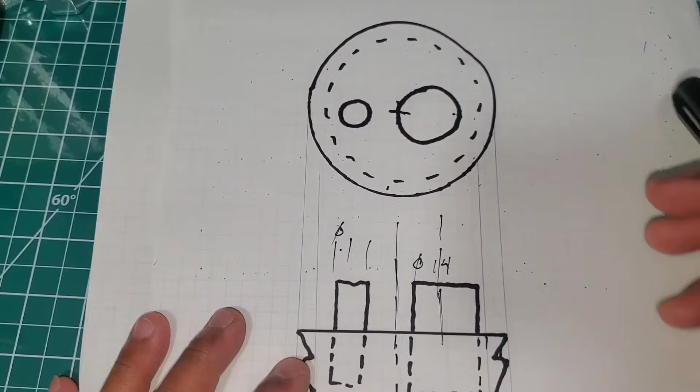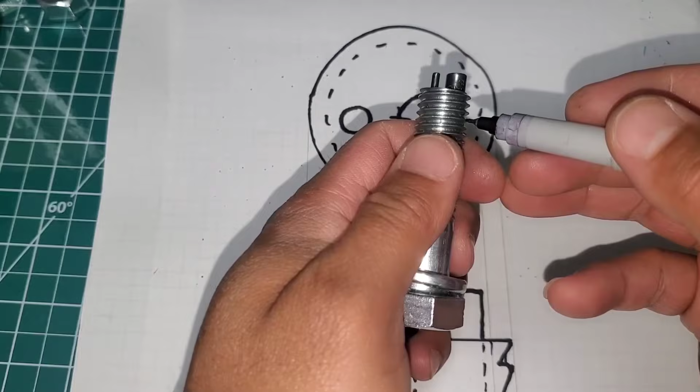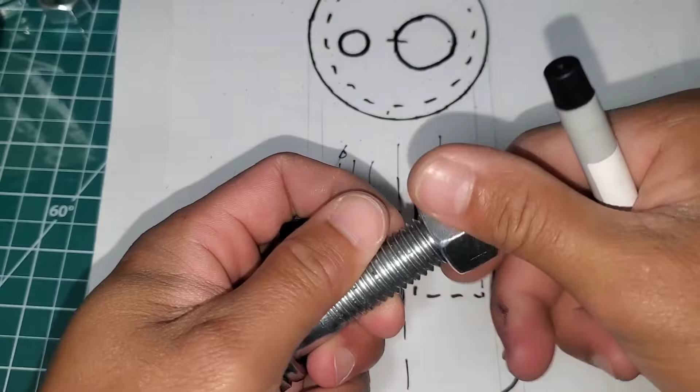So what I did is this circle in here represents the outside diameter of your bolt, and this hidden line will represent the minor diameter of the bolt. When you put the dowel pin on the bolt, you need to focus on not touching the thread. You need to consider that, so that when you put the nut inside it, it's not interrupted, like so. So what I did, this is the 1/4 dowel that will represent the internal diameter of your wire.

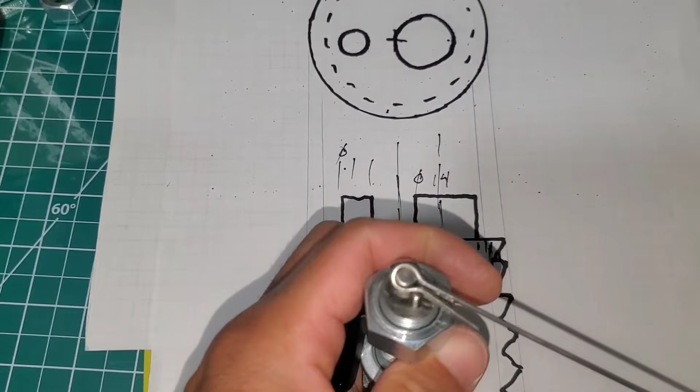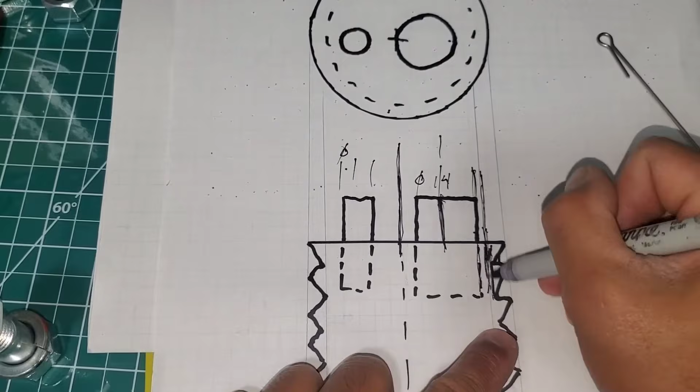And this small pin will just serve as a cornering for your bender. So what I do is from the center, I calculate half of my dowel pin, but I considered an allowance so that it will not touch the thread. It will depend on you.

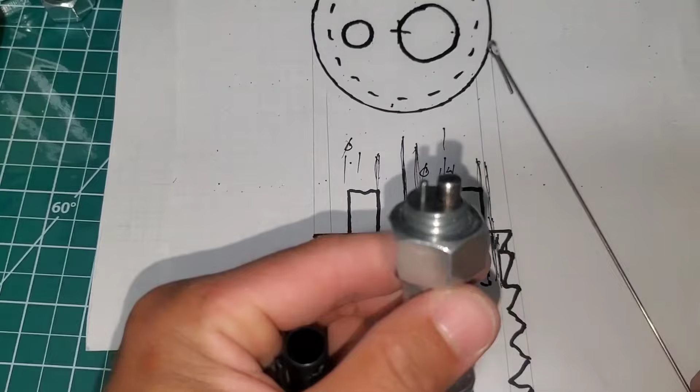And in this part, this is the gap, like this. You need to consider the thickness of your wire, it will fit in there, like so. And you need to put an allowance. I'm not good at explaining, but it will make sense.

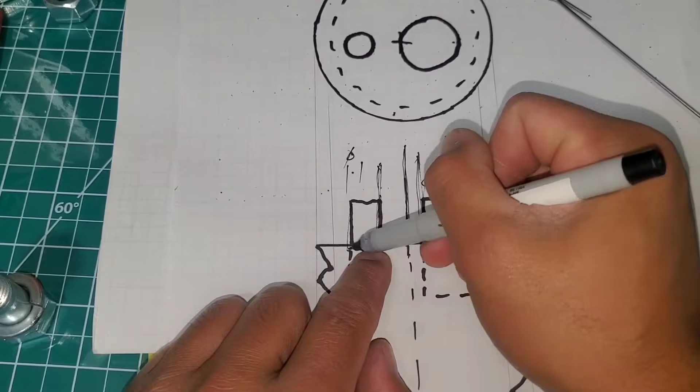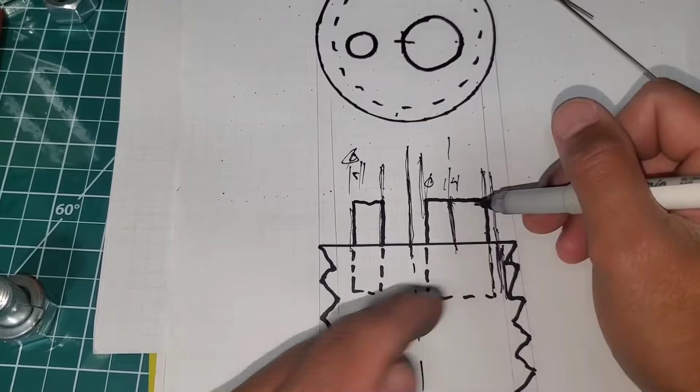And this is the dowel pin, the small dowel pin that will just serve as a corner bender. I use a diameter of 0.11 inches in here, or it will depend on you and what your material is. And this is 1/4 inch, that's what I want and what I need. But sometimes I also need a smaller one, like this one. This one is 1/4 for my bigger lure, and this one is for my smaller lures.

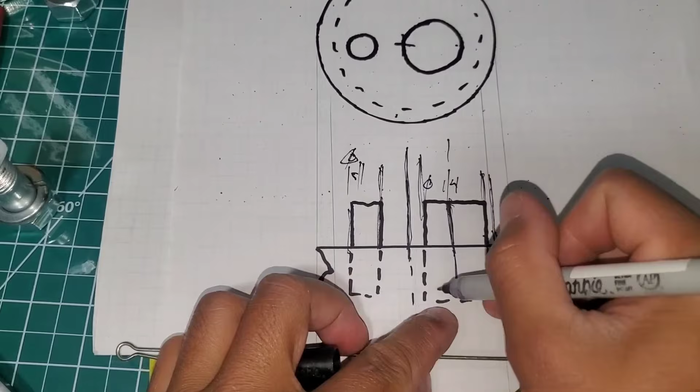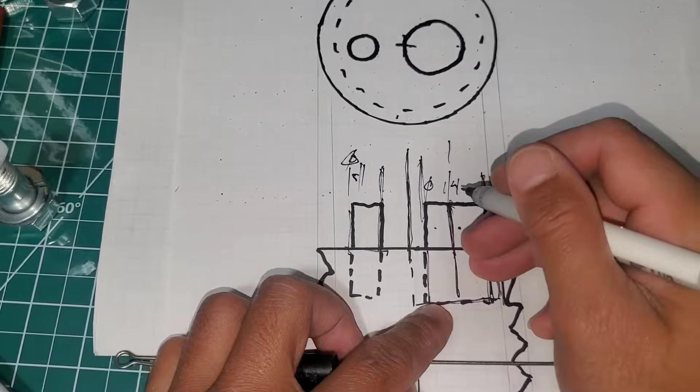So I drilled it like here, and I put 1/2 of the total length of my dowel pin so that it won't go out. And when you drill in here, it's supposed to be smaller than your dowel pin, so that when you press it, it will not go out. It's supposed to be a press fit like that, and also with the smaller one.

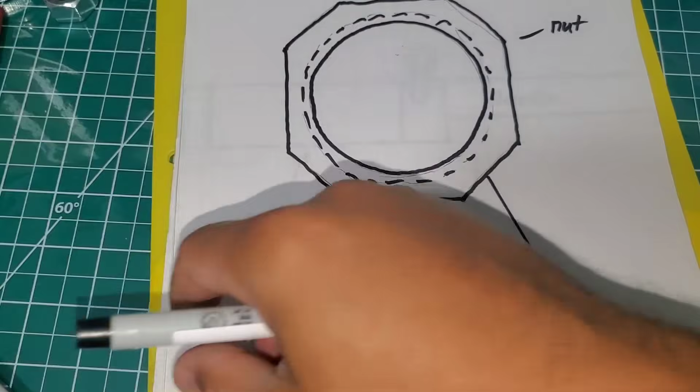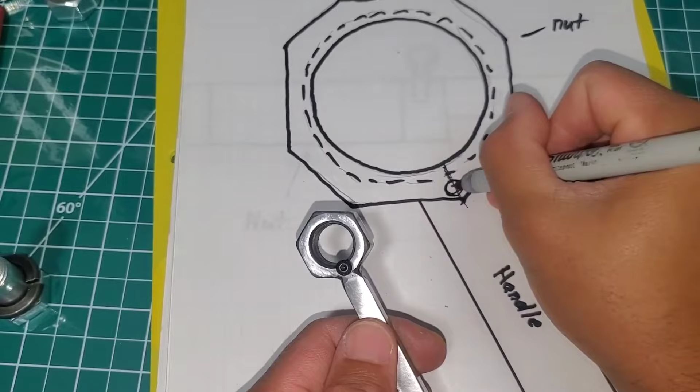And for the nut, here's the nut, the assembly of the nut. This will serve as the main bender, and this will serve as the body. What I did, I welded a handle into the corner here because this is the thickest part of the nut. And also I drill here and put a thread for my M3 bolt, like so. It doesn't focus like that.

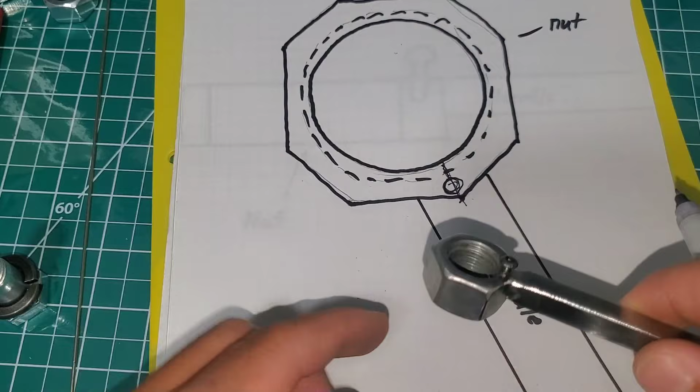You don't need to thread it through and through. You need to put a little bit of space for your wire that will catch the wire and bend it, and the head will serve as a stopper so your wire won't go out, like so. And this is the explanation for that.

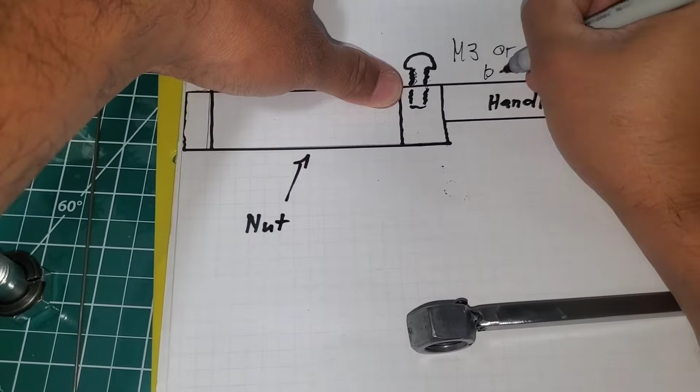This is the nut, and when you put your M3, I use an M3 or M4 bolt. The length is at least 3/4 inch, because 1/2 of that will be threaded on the nut. And this is the handle.

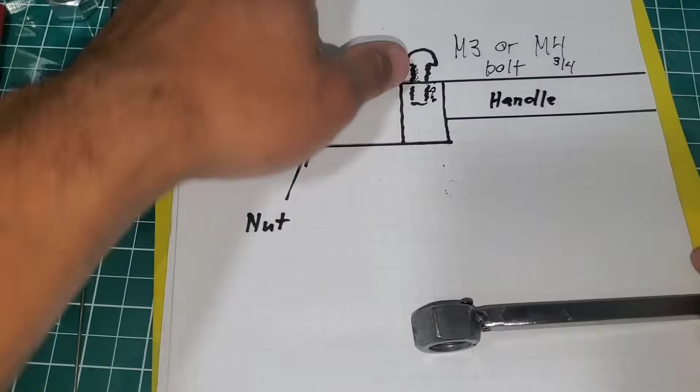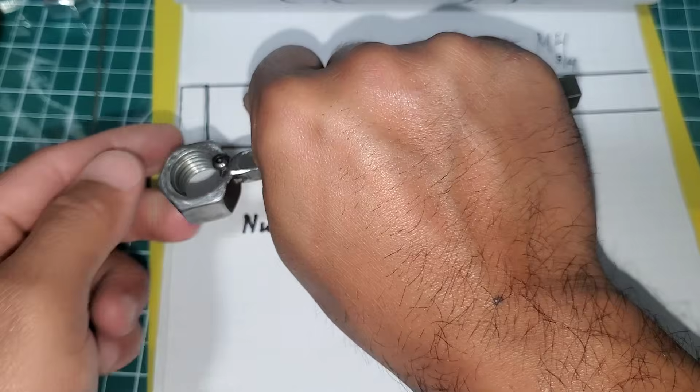The handle, it will depend on you and what material is available to you. You can use round wire or anything, and I measure it with my hand like that, like so.

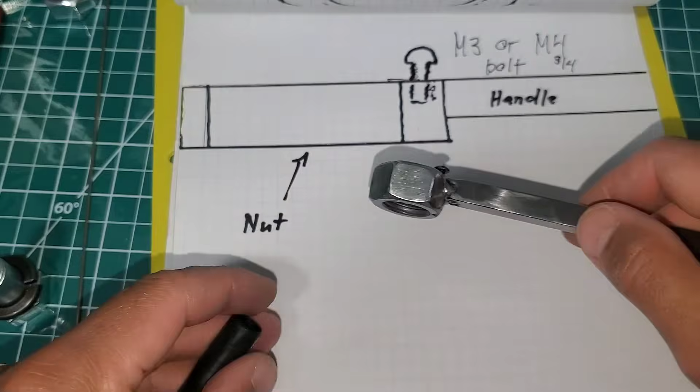Approximately 5 inches, like that. So on how to make it, let's make a video of it. Just stay tuned. So here are the materials for making the bender.

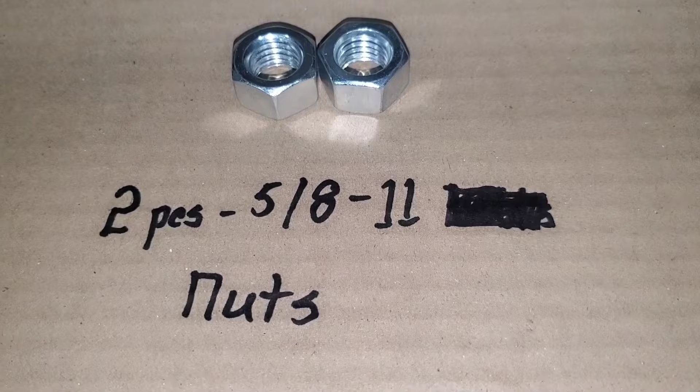We need 2 pieces of 5/8 by 11 nuts. This will serve as the locking of the bolt onto the table, and the other one we will make as the main bender of our DIY bender.

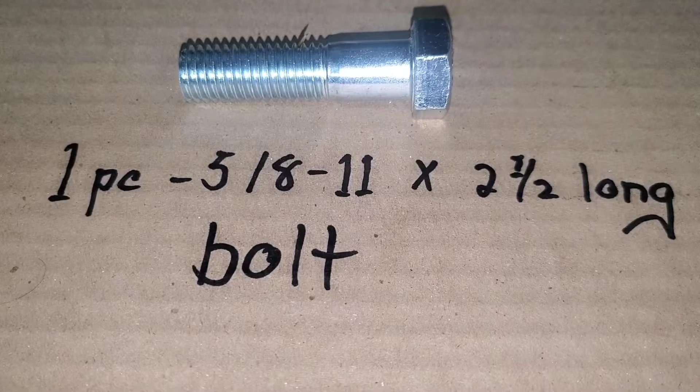We put the handle in it, and then the M3 bolt, and then of course 1 piece 5/8-11 by 2.5 inches long bolt, like this one, at least 2.5 inches because we will put it on our table like this one, and we will put a lock on it to hold it in place, and a handle like this one.

I use a square bar and I put a notch in there for welding on the nut, at least 4 inches in length. I just measure it on my hand, and it will depend on you.

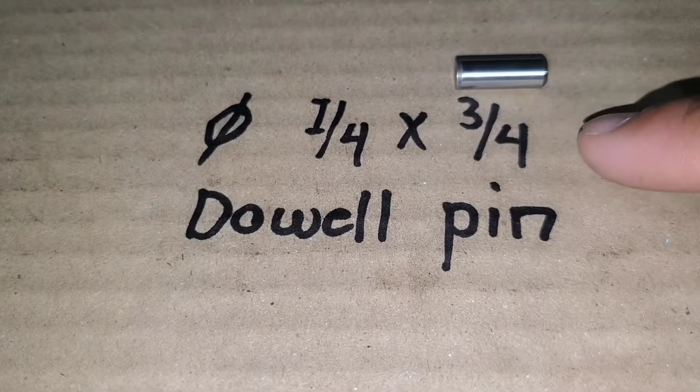It will serve as the cornering for our bender. And of course, the M3 by half-inch long bolt, or sometimes three-quarter long, like that one.

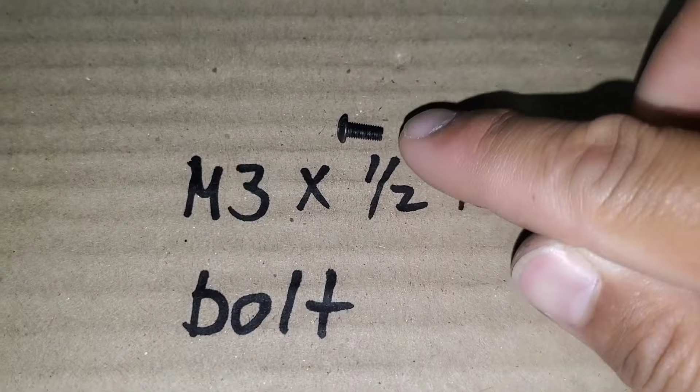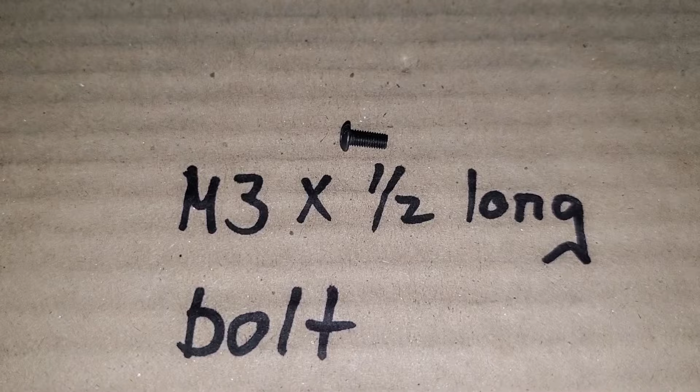It will serve as the catcher for our wire, and that will bend the wire through the dowel pin.

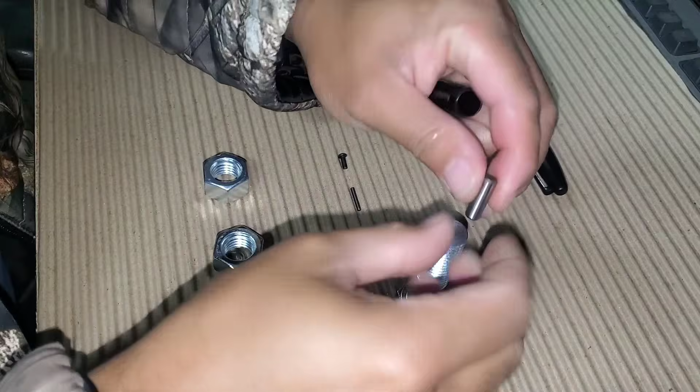Let's start making it. I'm making a mark for the drill to put this dowel pin, but I considered not to touch the thread outside.

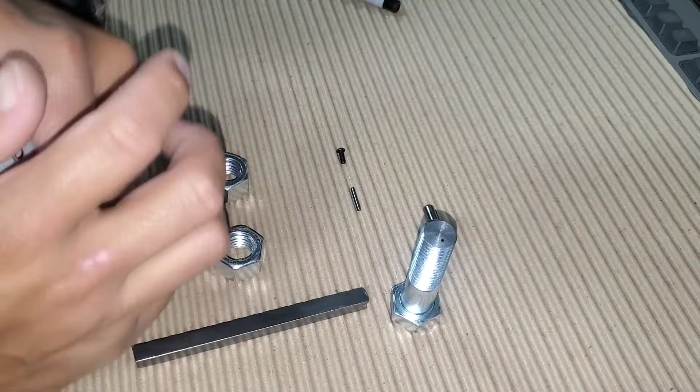It will depend on you. You can just estimate it, or you can calculate it. It will depend on you. I just calculated with my eye. I put a mark in there for drilling.

Like that. And also another one for the smaller pin, but let's see if I put it like that.

I'm just checking for the allowance for the wire, and also not to touch the thread. I think it's okay.

And then I put the dot in there to put my smaller pin, and the dot in there for drilling for the major pins, that's two holes.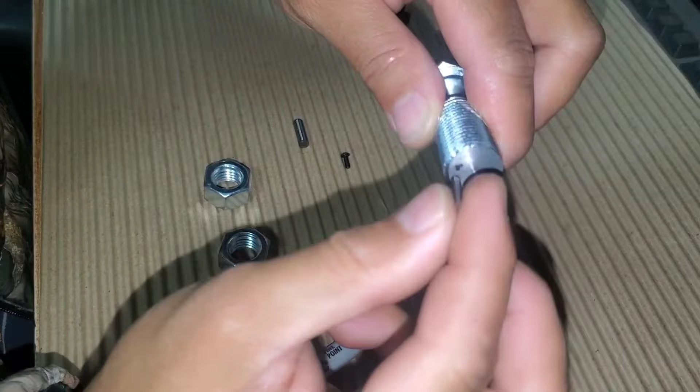Two dots in there. And I'm gonna put it like that and like that.

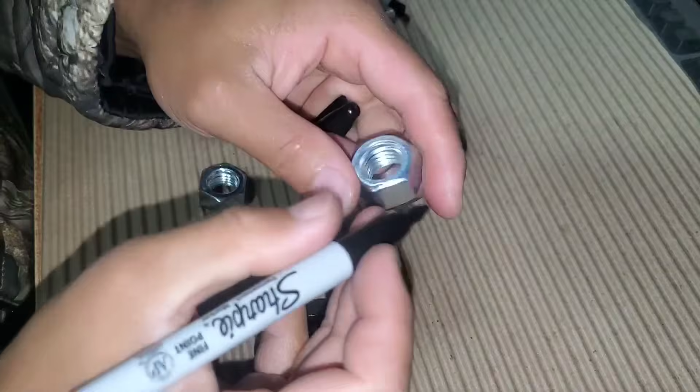So in this part, this is the nut that will serve as our main bender, and I'm choosing the corner of the hexagonal because that is the thickest part that I can drill.

For the M3, and put a thread in it without touching the internal thread. I will put this small bolt in there.

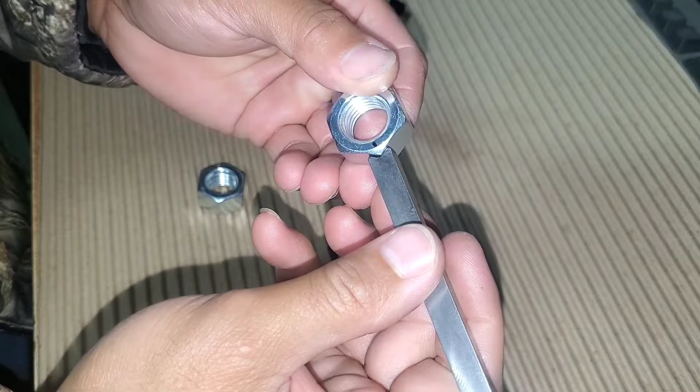This is M3, and I'm going to weld the handle in there where the bolt is located.

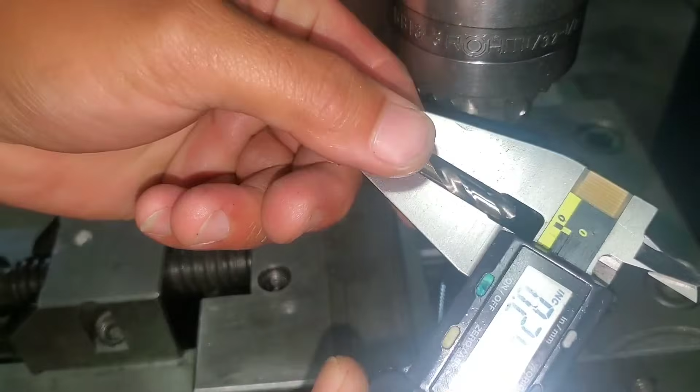Now let's drill it. I'm using a smaller drill for my quarter-inch dowel pin. I'm using a 0.2425 drill.

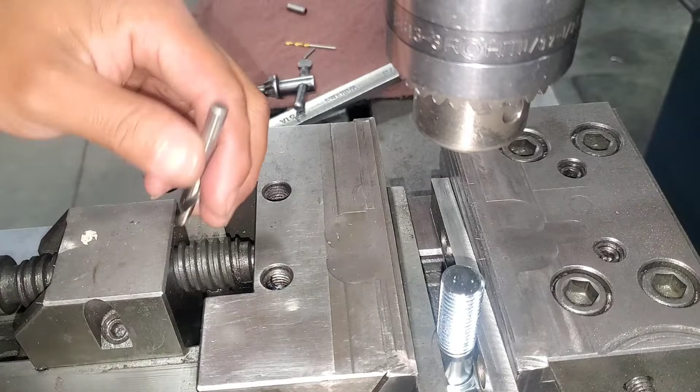A 0.2425 drill that is smaller than my dowel pin.

Now since I finished the drill for the quarter-inch dowel, I'm going to drill for the smaller dowel pin.

I'm using the 0.089 because my dowel pin is 0.1. It is a little bit smaller so that when I put the dowel pin it will press fit, not too loose.

Now it's okay. So now I'm going to press fit the dowel pins into the hole.

See, as you can see, the dowel pin will not enter the hole that I made because it is bigger than the holes.

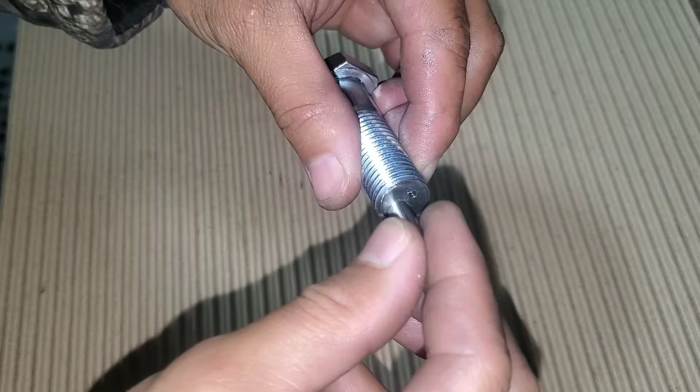The holes are only 0.24. My dowel pin is 0.25, and the other smaller hole is 0.091, but my dowel pin is 0.094.

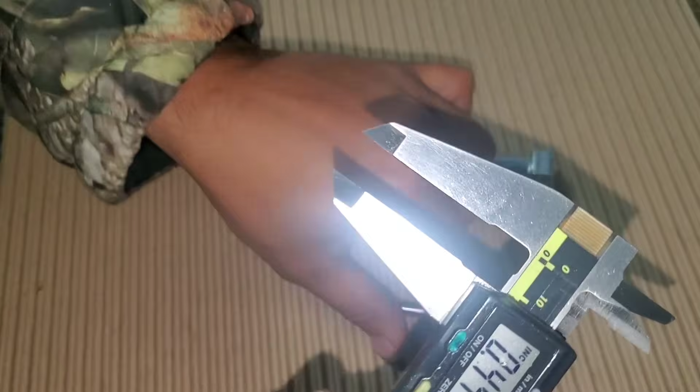And the quarter-inch dowel pin, it is smaller. So what I need is to just grind a little bit in there.

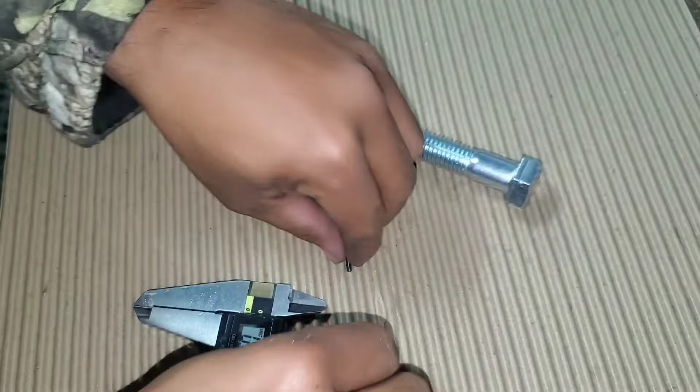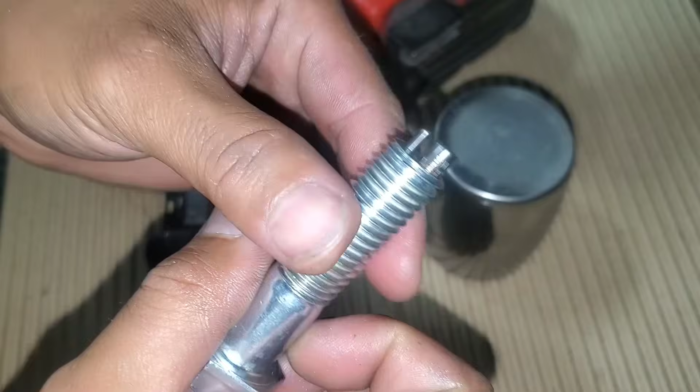But not too much, just to make a corner, and then this is it. I press it. I didn't show you how to press it, but I just hammer it in there in place and then grind it to make it even.

And the gap, let's see what is the gap.

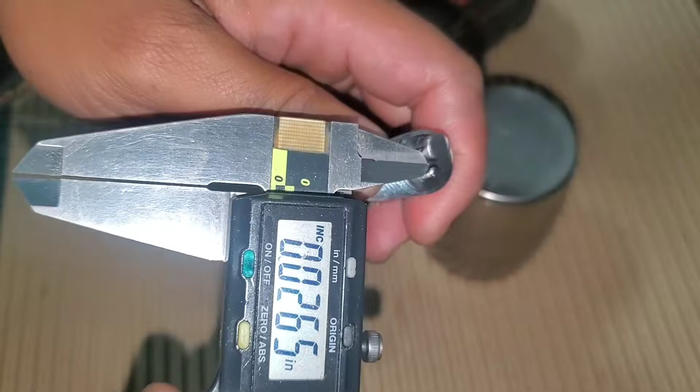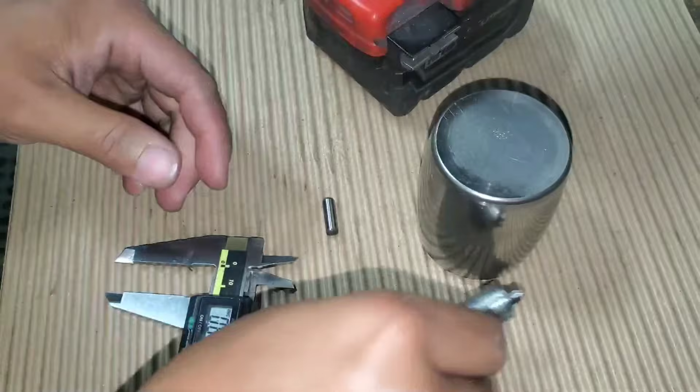Now it's good. And now what I'm going to do is to assemble the nut, the main bender.

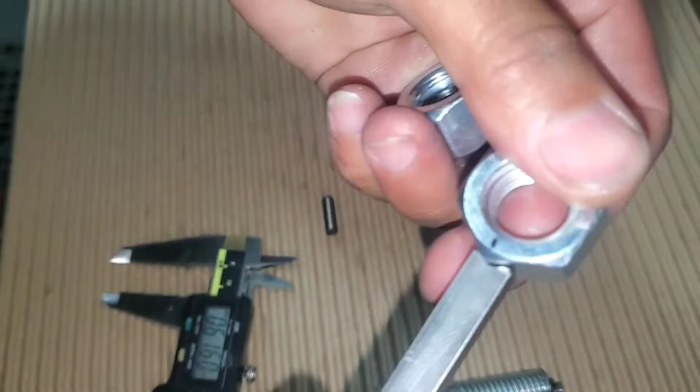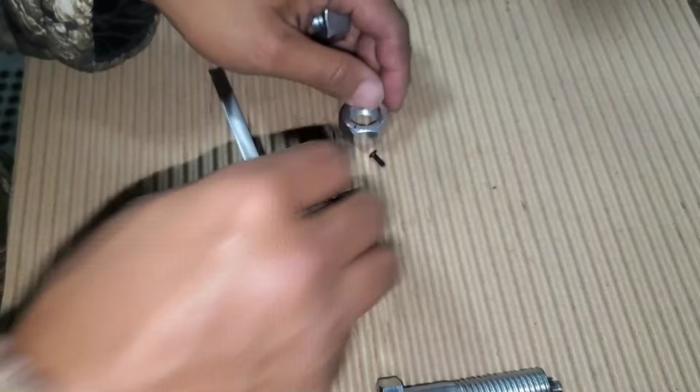In here I'm going to weld it in place like that, and the M3 is supposed to go in there. I'm going to make a hole in the top to put it in place.

Let's drill it. Now I'm going to tap it with M3 for my M3 bolt. Just be careful not to break the tap, it is a very small one.

It's M3, and also the nut is a hard material, almost tool steel. Just be very careful in tapping it — just one or two teeth at a time and reverse it.

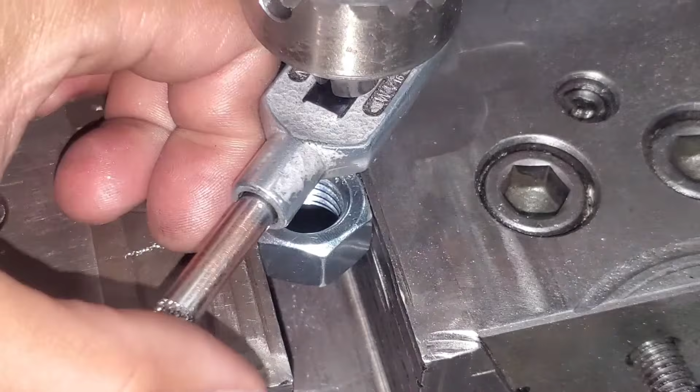So I'm not going to scrap the piece, like that. Just be very careful with it, not to break it, or else you're going to have to drill a hole in another place.

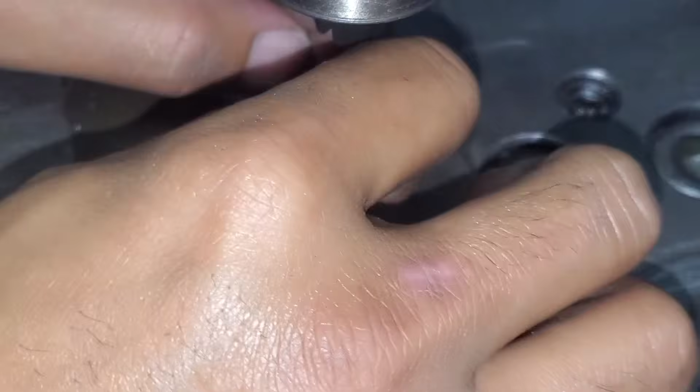Now it's okay, let's try the bolt. Let's try that, I hope it won't go through. Okay, the clearance is good, like that.

It doesn't go all the way down. I have a clearance for the wire.

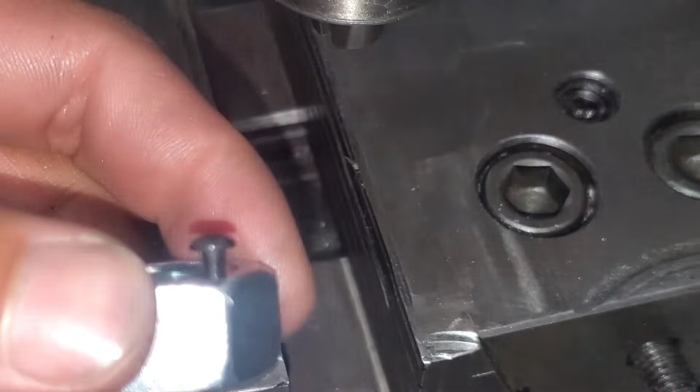This is good. You just tighten it a little bit, but of course we need to put a handle in it. Now it's okay — we need to put a handle and go weld it, but I need to check it first.

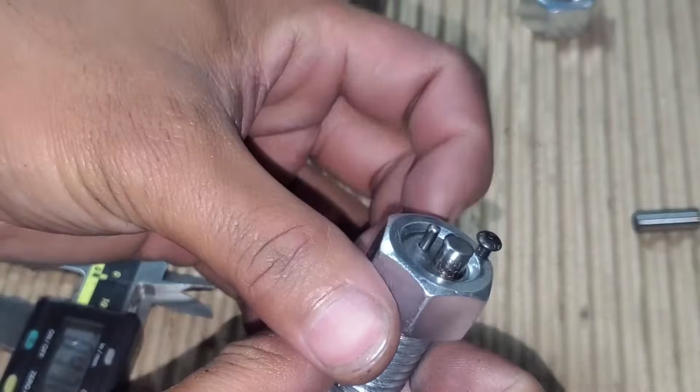If it's good, it doesn't touch the big dowel pin, the quarter-inch one.

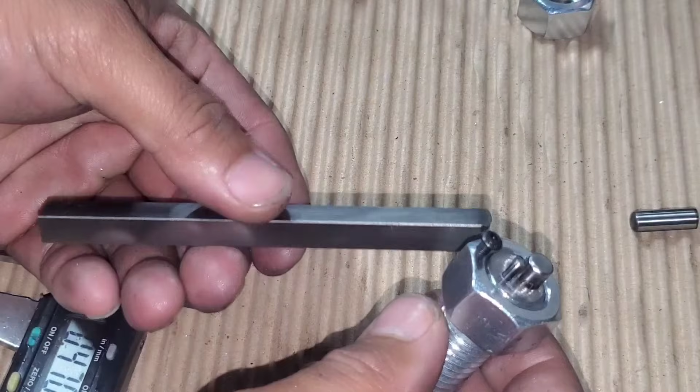Now based on my observation, it's good. Now I'm going to weld the handle, and I will place it beside the bolt.

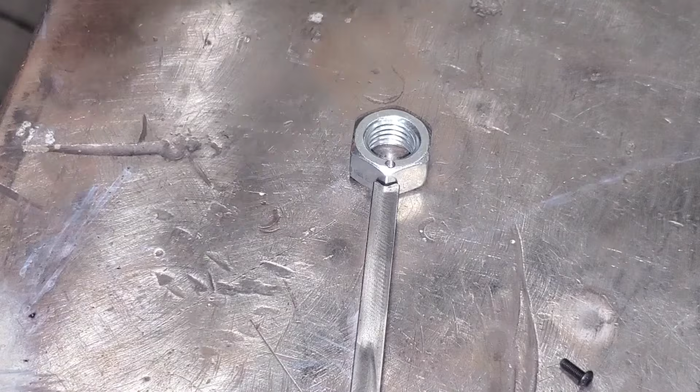And now let's weld it. I'm not good at welding, but I will try it. Oh shit.

Try again. Just don't breathe. Yeah, I think I'm getting it.

I'm not good at welding. Oh jeez. I think it's a little good.

One more time. Ooh. Oh, it's hot, okay, it's hot. Don't do that.

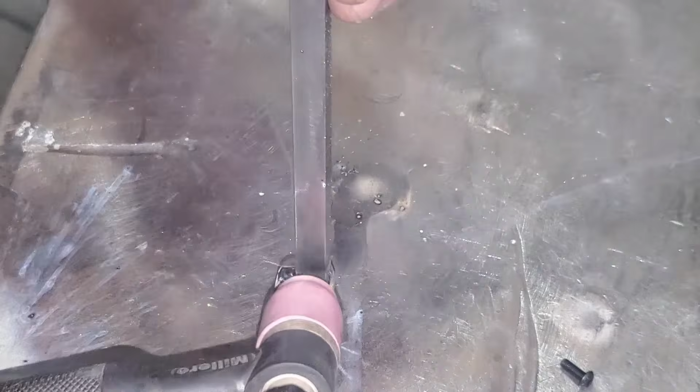Just make sure the welding will not crack when you're using it. I'm not good at it. That sucks. Oh shoot.

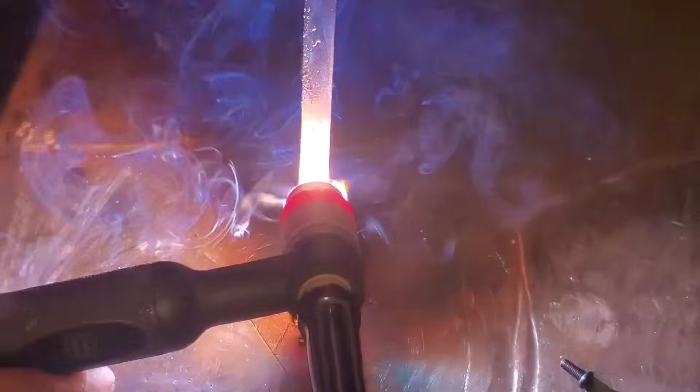Yeah, I think I got it. Another one. Got him. I just need to grind it and put the...

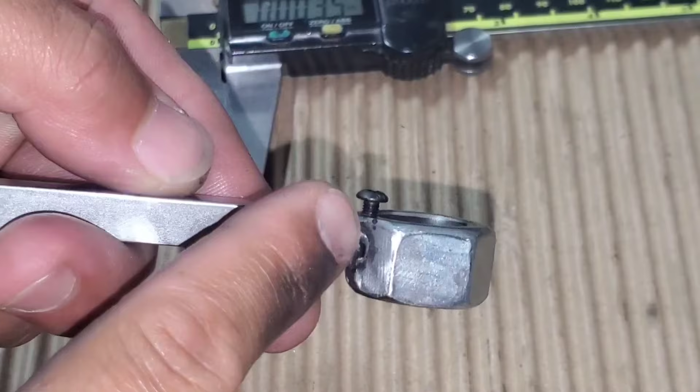Bolt in it and try it. After I welded it, I'm not satisfied, so I'm just gonna add a little bit like that one. After the hard work of welding it, I just grind it and put the bolt in it like that. Now it's assembled.

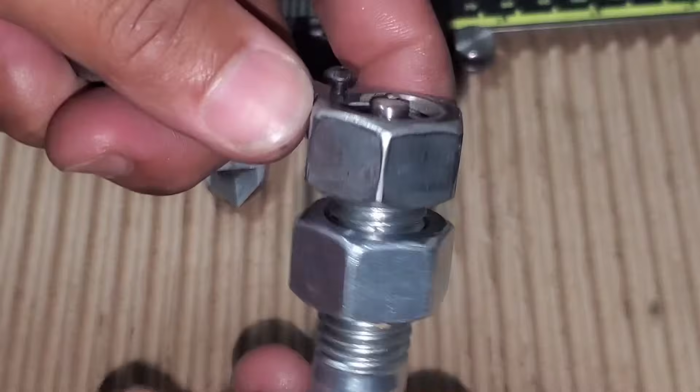Yeah, I'm satisfied with it. Now let's try it. Yeah, it's good. Yeah, I think it's gonna work.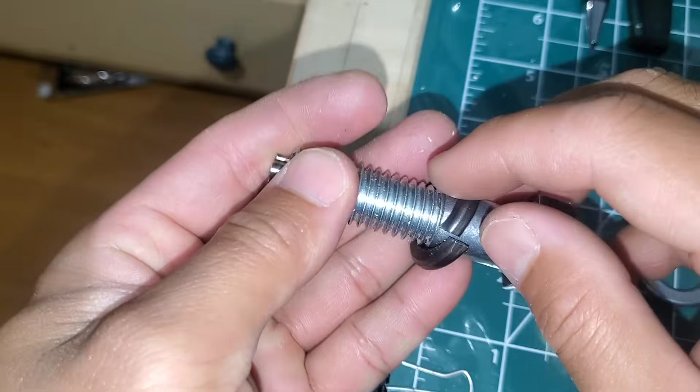And now I'm going to show you how to use it, how to make a bend like this so that you can use it for making a lure. I suggest that you use also the lock washer so that it will not turn when you put it on your table.

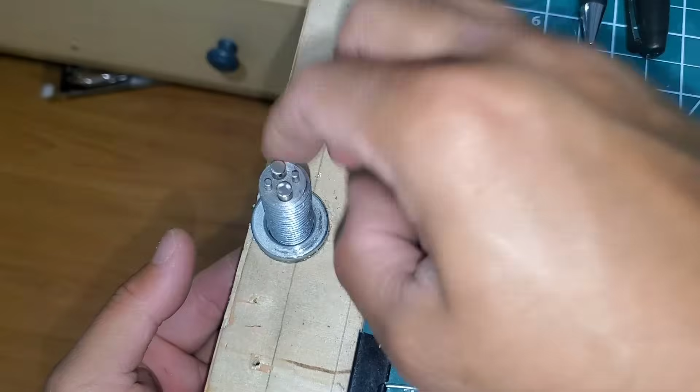I just drilled it like that and put a lock washer down under and then on the top, and then the nut for locking it in place.

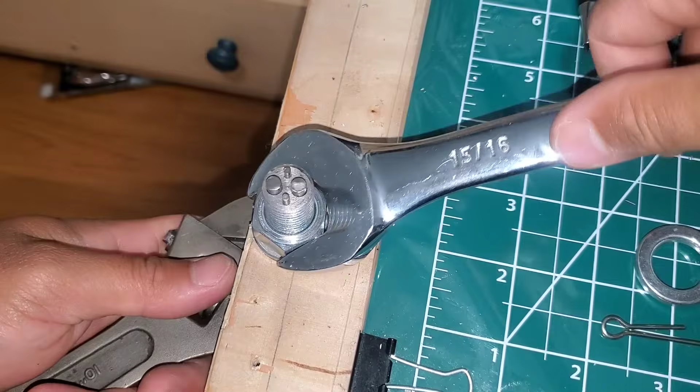And I position the smaller pin in front of me, and the two main bend diameter pins, the huge one, supposed to be across. Then you need to tighten it a little bit so that when you're using it, it will not turn.

You can just put it on your working table and remove it and then change another bender like so.

So what I'm going to do is to make a wire for my lure, for this mold. This is the mold for this lure, like that. So what I'm going to do is I got my wire.

So you have to put it like that, and then you have a wire like this. You need to put an allowance at least 1.5 inches or 1 inch for the bend.

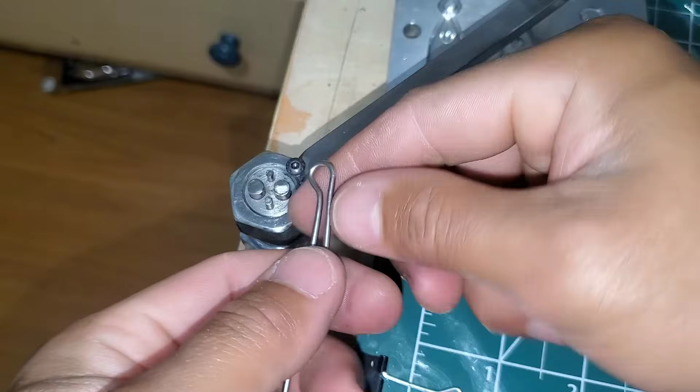You adjust it from this position to this position, and then this is the smaller dowel that will serve as the cornering. Now it creates a corner like that, and then to create another corner you just flip it the other way and then bend it a little bit like so.

Now you get your eye, just one eye, then you just press it a little bit and then measure it on your mold like so.

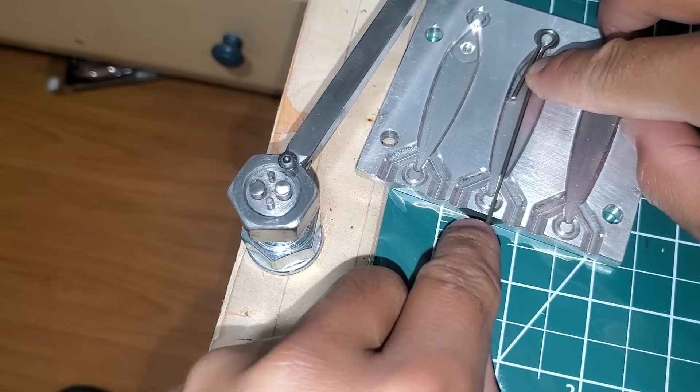Now I'm going to mark on the other end of the wire like so. And now this mark, I will put it in between the nut and the bolt so that when I bend it, it will wrap on the dowel, but it will position in the center like that.

Just gonna move it like so. As you can see, the mark that I made is on my right side, but it will go on the left side once I make the bend like that. See, now it's on the center.

And just do the opposite like that. And if you want to make it a little bit perfect like so, and now if you measure it in here...

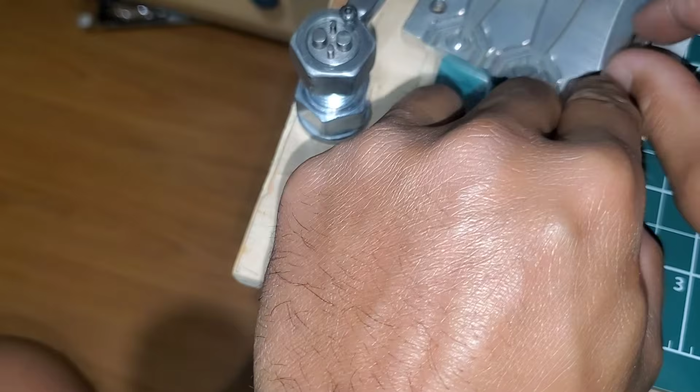I'm just gonna cut it and then twist it a little bit.

Now I got my wire here. You don't need to straighten it or whatsoever, because when you pour lead in there you cannot see it anymore. But if you want to make it a little bit straight, you just need to bend it a little like so, like that.

That is the purpose of the DIY bender, to make the eye for your wire like so. You can use it for making a lure or making weights or everything.

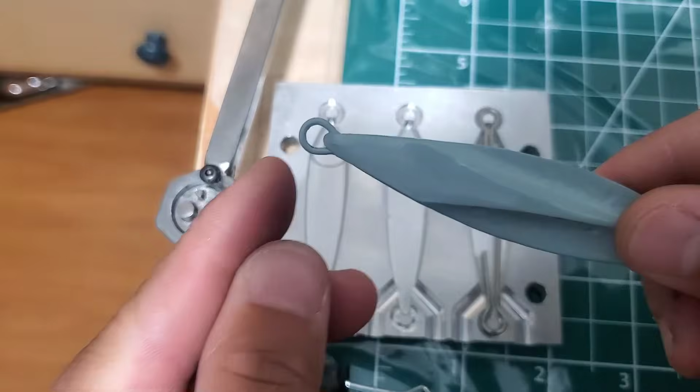This is one of my lures that I'm making, like a slow pitch jig. That is the wire, and also this one for my mackerel lure. That is the wire, and this is the mold that I used.

So that's it, that's the purpose of this one, because some of you guys are asking me - I watch all the videos but I still don't know what is the purpose of the wire that you bend. This is it, guys. So thank you for watching, and I hope you understand all the explanation that I made on this video, and thank you for the support on my channel. I hope you enjoy life and continue being happy people. Thank you.